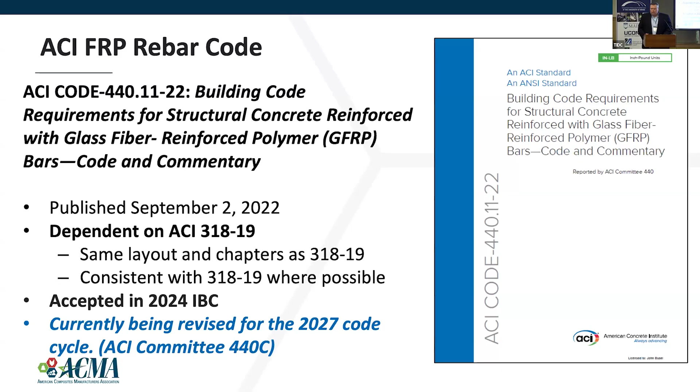So one of the things that I feel like I've been a part of since the very beginning was the development of the FRP rebar code. This is kind of like the Holy Grail. This particular document was 4 years in the making, but there was a previous 15, 16 years ahead of that with the design guideline for FRP rebar used in concrete. This has become a very critical document and certainly noteworthy. It is currently being updated for the 2027 code. So expect some new material, but also refinements on the existing material in the standard.

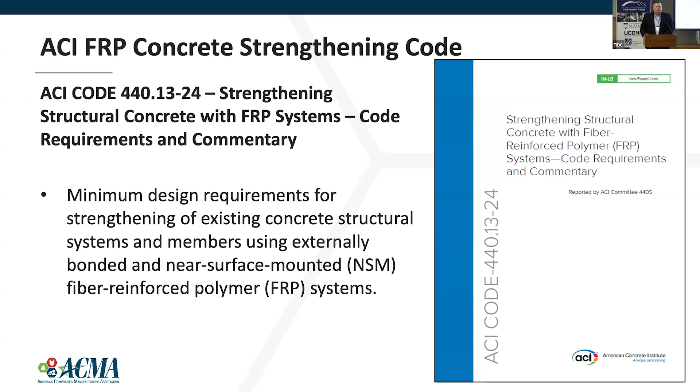Boy, I spent my career on this one. First of all, trying to do LRFD was a major milestone. To do it with pultruded composites was another. This particular document was 10 years in the making after the previous 10 years of doing the background work for it. I'll tell you that it is a prime document that has met the test not only of time, but of practitioners out there that had a very high bar as to what they needed to know about FRP.

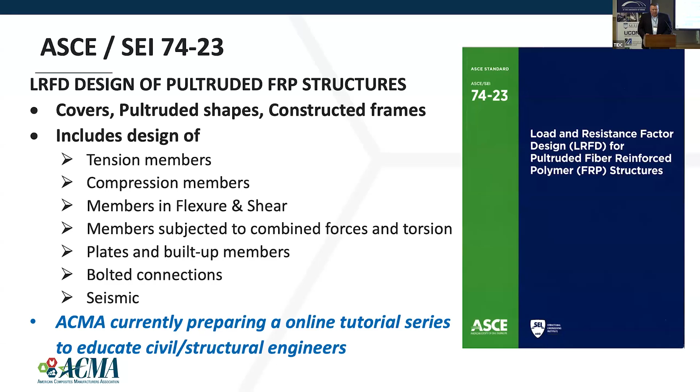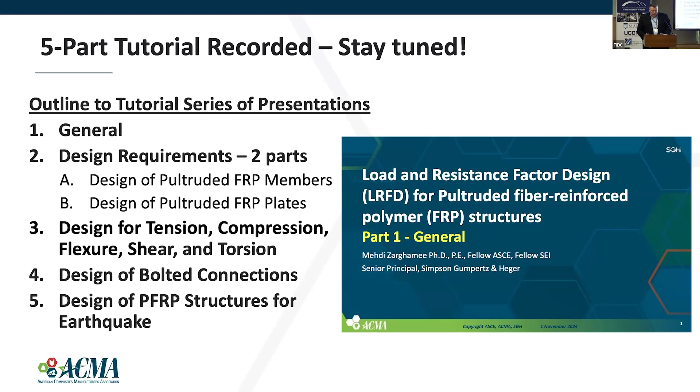ACMA is currently developing a tutorial series on this LRFD. So stay tuned. It's a 5-part tutorial that will cover the entire gamut of utilizing FRP in structural connections and seismic design, as well as all of the typical subjects that you would normally find in structural design.

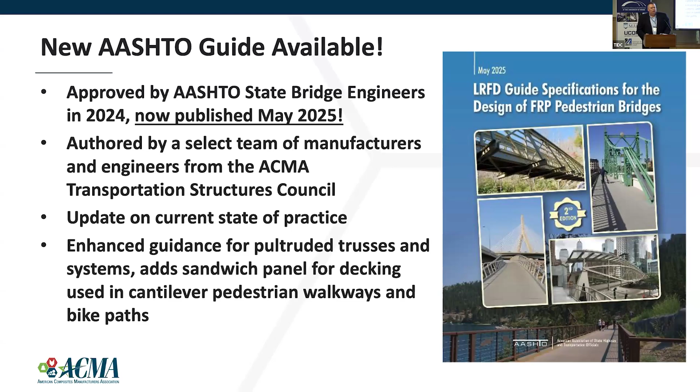A new AASHTO guide is available, and this is really fun because ACMA back in 2006 drafted, for the review of AASHTO committee T6 at the time, a design guide for FRP pedestrian bridges. So that was 2008. Now we're in 2025 and we have a brand new edition, and it's been elevated to an LRFD on top of that. So it's good to have code and commentary.

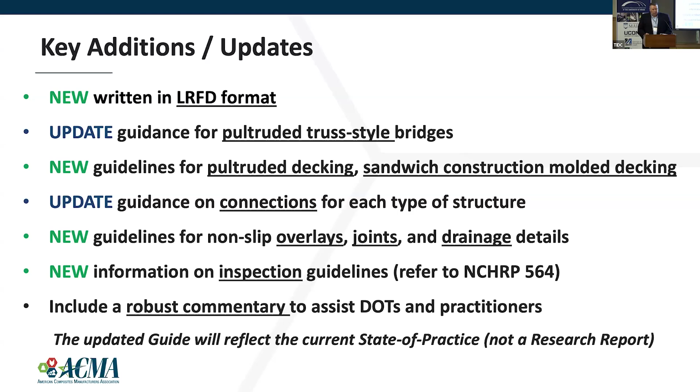One of the unique things is that it's written in an LRFD format. I think probably the most valuable part is that it has a robust commentary for engineers and designers on how to apply pultruded FRP, as well as sandwich construction that was shown in Joe's previous presentation, and cantilever walkways.

Of course, there's always something new. And the next one that's coming up with the Committee on Bridges and Structures is composite tub girders. This is, as it was talked about in Joe's presentation, authored by Dr. Bill Davids, and it's led by the AASHTO task group of the AASHTO Specialized Structures Committee, a committee that we need to be working very closely with. Hopefully the draft will be completed in January of 2026, and balloting of that document by the state bridge engineers

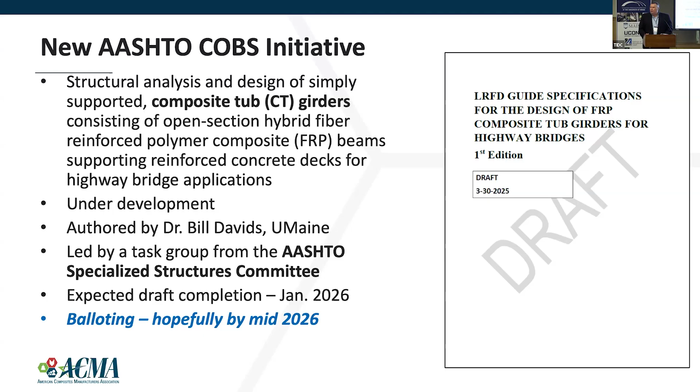by mid-year. So in the previous couple of years, we've had a number of things that have been put into place with FRP. And it was shown in one of the previous slides from Kelly's presentation on the LRFD for bridge design. This is on GFRP reinforced concrete, and it was done in 2018. There's a current revision going on, and I think the big major change is harmonizing this with the FRP rebar code, along with other technologies. So this is a prime example. I know that the AASHTO COBS Concrete Committee has got this on their agenda for 2026. So be on the lookout for that.

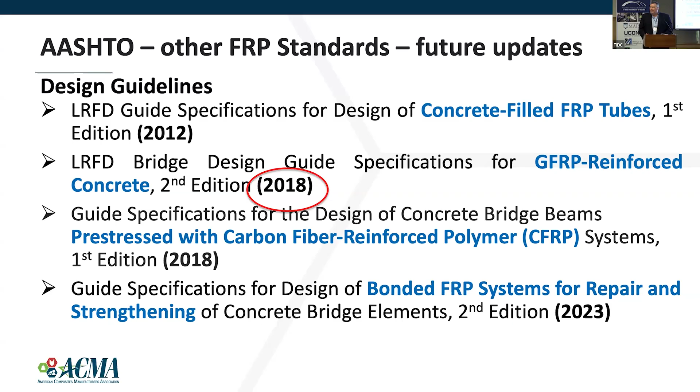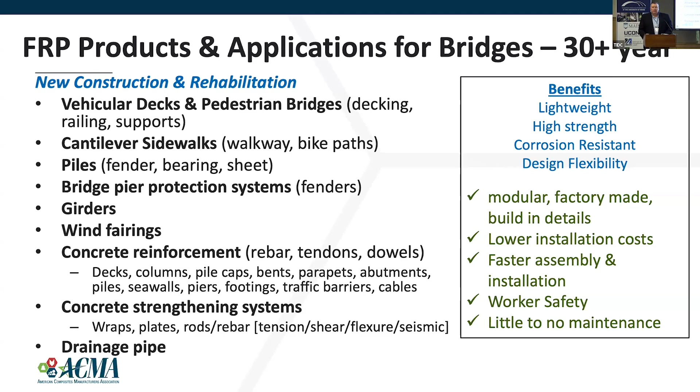And as it was brought out in one of the previous presentation slides, the benefits of lightweight, high strength, corrosion resistant. Those are the calling cards for FRP, but design flexibility, that's the one thing that composites can certainly provide. So I'm not going to spend too much time with these, but I just want to give you that little tour. So concrete strengthening and repair. There are thousands of installations that have utilized both carbon fiber and glass fiber to retrofit, to extend the service life of existing structures, to seismically upgrade those structures.

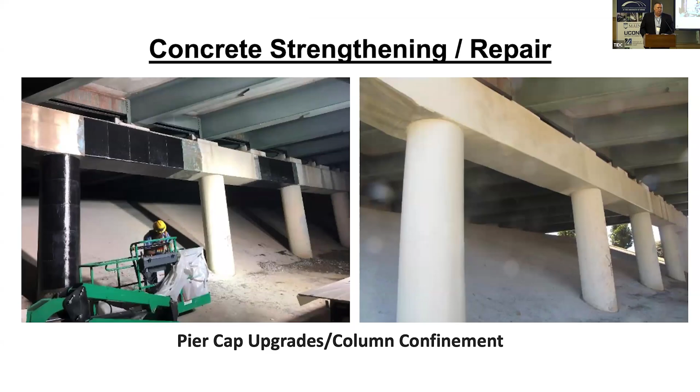Prefabricated bridges and bridge decks have made a transformation in how one would utilize composite products in the field to minimize installation, to increase faster times. The one thing that always gets me, for those in the Washington, D.C. area, the Wolf Trap Bridge, which spans the Dulles Highway, nothing like shutting down that highway for 15 minutes while they're lifting a FRP deck into place. Couldn't do that with normal construction. So these are certainly unique opportunities we need to take advantage of.

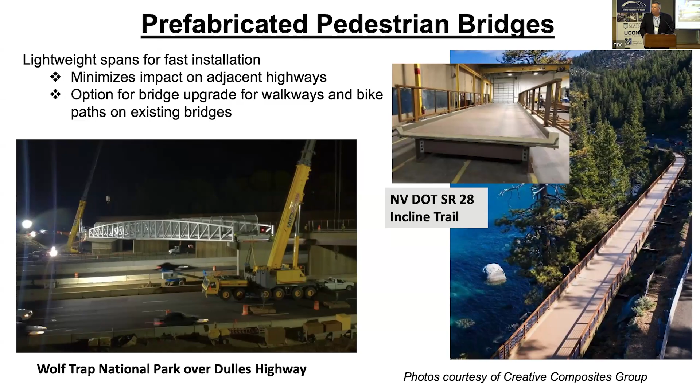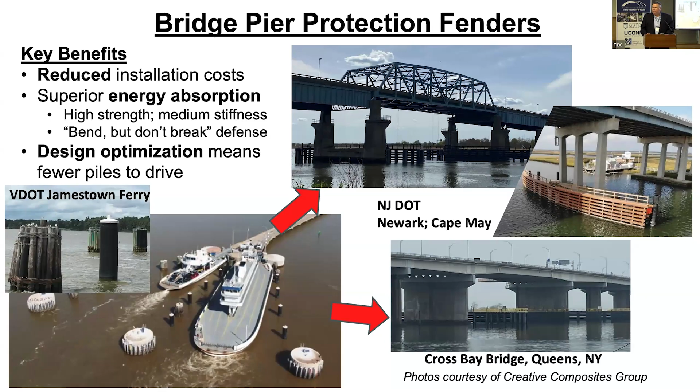And with the Key Bridge in Baltimore being struck by a ship, I think what we're going to see more is bridge pier protection. This is not new to FRP. There are many installations shown here, in Florida, in Virginia, in Delaware, and even in New York City. And they recognize what FRP can bring to a very corrosive and aggressive environment. We talked a lot about the GFRP tub girder or the composite tub girder, and it's going to lend itself to accelerated bridge construction. These are great examples of applying materials and a technology to expand the horizon.

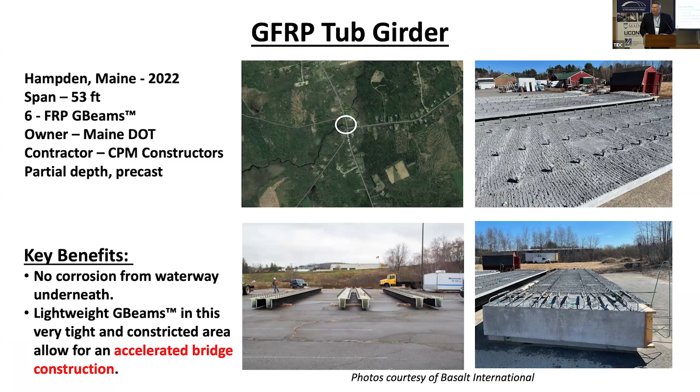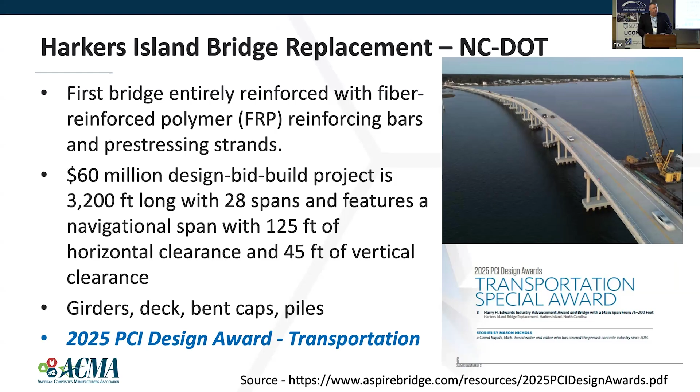So there's two different bridges that I want to note, and they were significant because of what they delivered. One was the Harkers Island Bridge replacement in North Carolina. As the slide says, first bridge reinforced with FRP rebar and pre-stressing strands for girders, decks, bent caps, and piles. This was unique. This was cutting edge. This is the state of the practice. So we need to go forward and learn from these applications and this particular structure. And PCI handed this the 2025 Transportation Award for its structure.

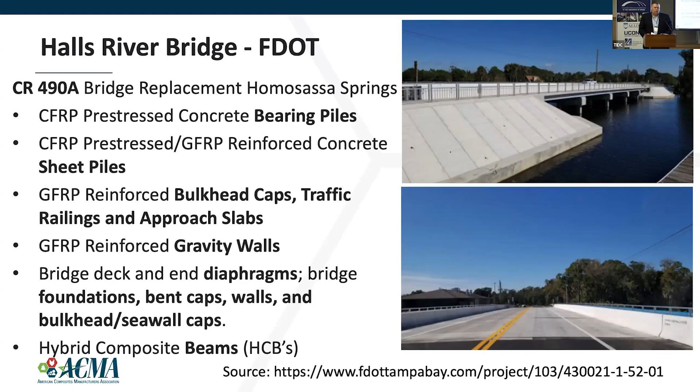Joe just covered this on the Halls River Bridge. This is a great playground of a bridge, being steel free on a lot of different technologies: girders, decks, abutments, foundations, and it's a prime example of what we should learn from. And Joe in the previous presentation talked about the decarbonization element and the value that came from not only the life cycle cost analysis for this bridge, but what it would do for sustainability.

So as we look to the future and we're overcoming the barriers, what does that look like? So sample needs of the customer. Faster installation and field erection. I think that was brought up in a number of different conversations. Reducing labor, not necessarily in the manufacturing of these products, but in the field. Construction jobs are on the increase, and we have to think about the amount of personnel that's really out there to construct these, let's call it, higher technology installations and bridges.

Always to look at increased safety and inspection of those structures and how we best go about doing that. Certification of products, and this is going to be a very key thing that I see happening for the composites industry in the future. Yes, long service life, that's in the DNA of composites, but we need to demonstrate that. We need to showcase what that means.

Sustainability, I know Joe just talked about sustainability, but is that going to be a factor in bridges of the future, especially given the current administration? But what is that going to look like? And is there a need for that? And I know Kelly brought this up, reduced costs.

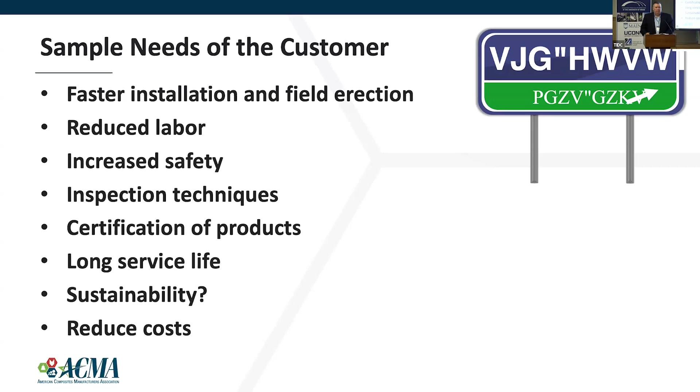And the use phase of composites, whether it's sustainability or even for life cycle costs, that's where we benefit. So, I use the analogy that, hey, I'd like to drive a Lamborghini. I can only afford a Hyundai. There's a little bit of that. And I think we have to put things in perspective.

So what does that future look like? Some suggested goals for consideration. Doing things that are easier to specify, standard elements or components or modules so that it will be faster to assemble and transport. Automation of the manufacturing process. And it has a lot of implications, whether it is reducing the labor, but enhancing the repeatability and increasing the quality as well as increasing the production.

Education and buy-in by the end user. That's going to be a chief thing. How do we educate the end user so that we can help them feel that the risk that they're taking on using innovative materials is worth it? And I can't underscore this because it really comes back down to risk. And there are a number of people that I know from the top of my head that have taken the risk and applied some very good technologies that still work today.

And the one thing that I think about, and Dr. Roberto Lopez was a part of this, the McKinleyville Bridge, a 157-foot bridge in McKinleyville, West Virginia, was the first bridge utilizing GFRP rebar in the concrete deck. Well, there's been no maintenance to that bridge since 1997, and it still is a work of art today. So let's look at some of those older installations and have that feel and reduce that risk of what that could be for the future.

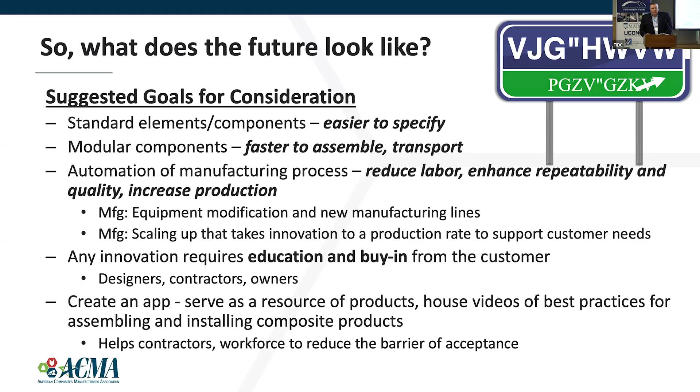I throw out here, create an app. Everybody looks at our smartphones today. We're always looking at apps. And boy, it would be nice to dial up a composite product on an app and kind of see what its durability is or what its strengths are. So how do we create that tool for the user?

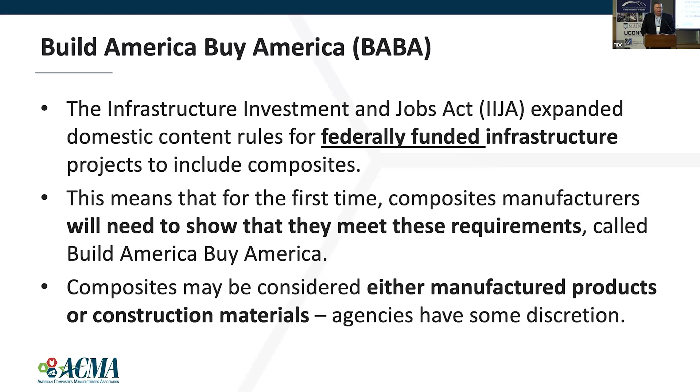So one thing I was asked to address is Build America, Buy America. And we have a very unique message for this. So for all federally funded infrastructure projects, we need to show that we meet the requirements of Build America, Buy America. Composites may be considered either manufactured products or construction materials. And the agencies have the purview to provide what that direction looks like. So for manufactured products, final manufacturing must be in the US, and the US inputs must exceed 55% of the value. So that's an important component.

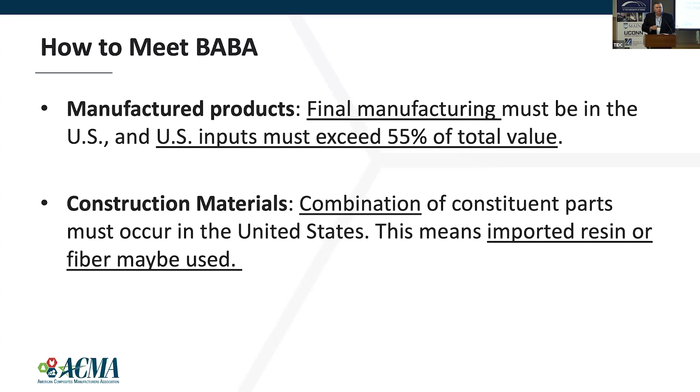From the construction material side, it's a combination of the constituent materials that must occur in the United States, but this means that imported resin or fibers may also be used. So these are very important distinctions on the Build America, Buy America, and we can talk offline about that.

So in conclusion, what does advancing mean? Developed standards over the years, having large key installations that are noteworthy, that really push the envelope, shows to me that there's a greater acceptance of the technology. And probably very few people in their careers can say you were at the very beginning and, towards the end of your career, like me, you are looking at a lot of the successes from all of the seeds that were planted over the years. No doubt, the other part of the DNA of composites is constant innovation. So we have to balance innovation with applying technology.

Standards and educational tools are going to be incredibly important to educating engineers. We also need to provide those tools that grab the attention of young engineers. And I don't exactly know what that vision looks like, but we got to figure this out. And one of the things that will always translate is that as businesses expand, operations will become more efficient, and I think just because of the technology that is out there.